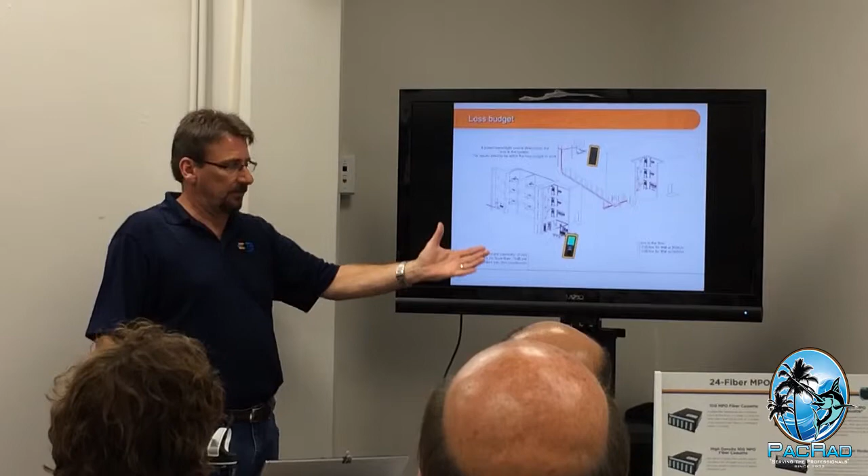Okay, here's my launch device. Here's my transmitter on the launch side, and it puts out a signal at this power level. When I get to the other end of that link and plug into the receiver, it's going to have a sensitivity that says the signal that arrives here has to be at this power level.

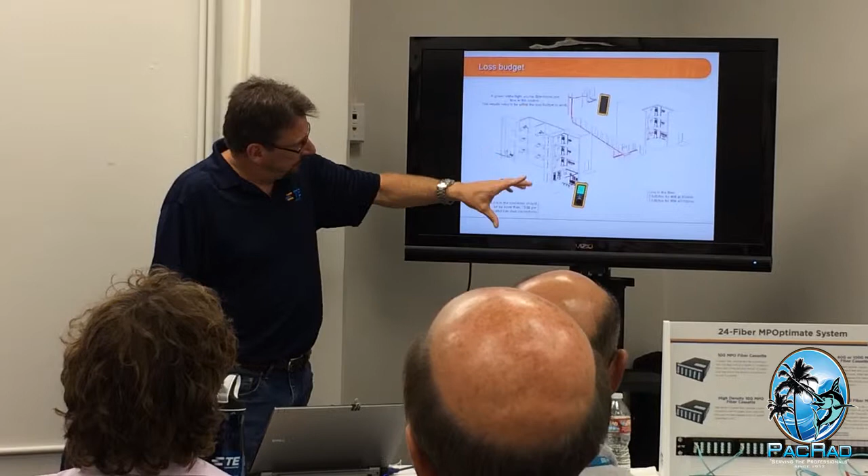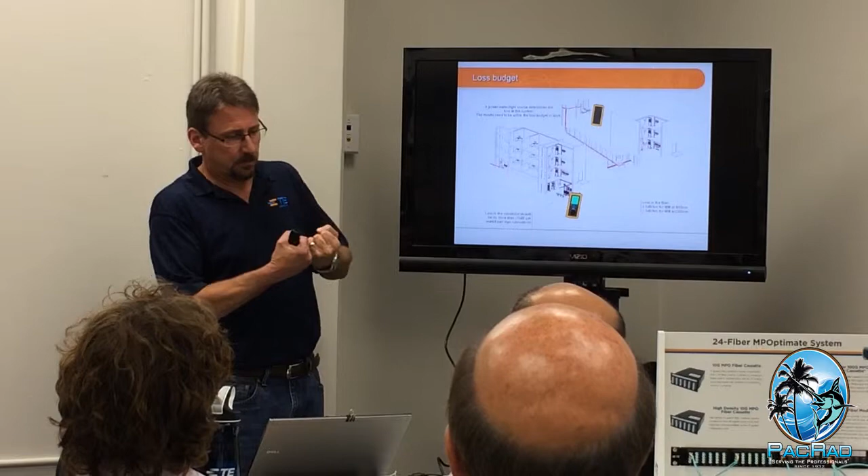All of the stuff in between, whether it's fiber cable, which will have its own bandwidth and loss characteristics just for the cable, and then there's guidelines by which the mated connections have to meet in terms of loss, and then splices as well.

So when you figure the loss budget up, you say, okay, if I add up all these points of loss and take that away from the transmit signal, is it going to be enough for the receive side? So there is some math calculation that should be done.

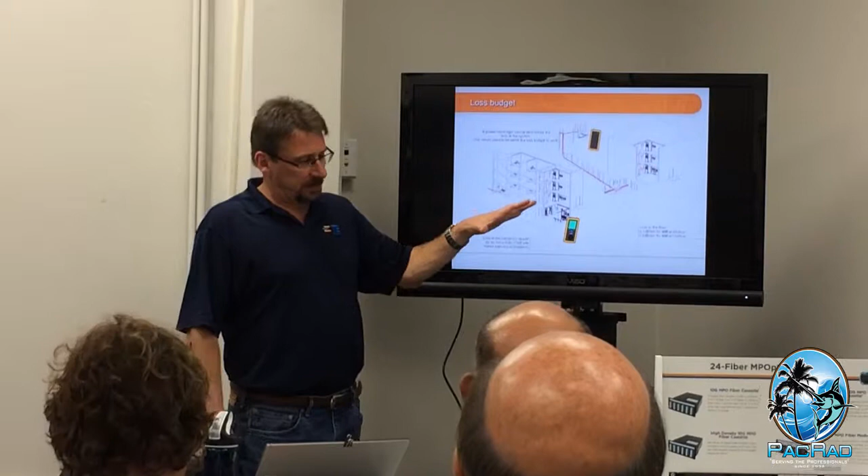Now a lot of today's testers will go out and test it and validate it for you, but it's just good practice to make sure you understand. Okay, I'm going from A to B. Here's what I'm sending in power, here's what I want to receive in power. Does it look like if I build this way, it's going to work? Because you can build it and have it not work, and then you're in trouble.

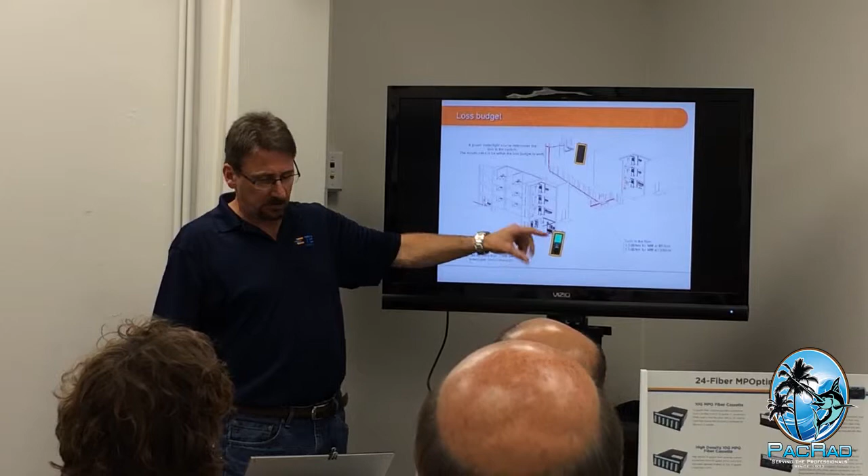But this test device is what's called an optical loss test set, OLTS, where it's just a light source that launches light into the system, and then a meter that reads at the other end how much was lost over the distance. Very important test set as well.

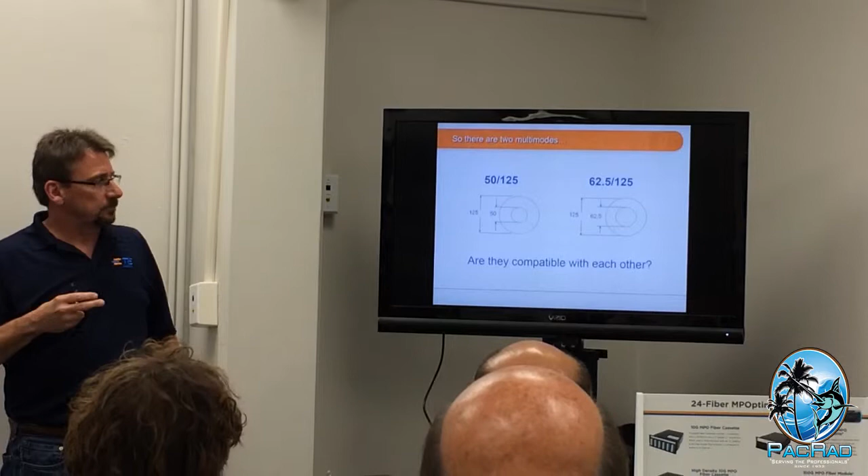Okay, so we talked about the fact that there's two different kinds of multimode, 50 micron and 62.5. Are they compatible with each other? So let's say, for example, I've got a fiber plant where I've got some older 62.5 and I want to add the newer 50 micron.

Can I intermix them? Depends if your loss budget is... to a certain extent, yes. Because I've seen it in our building where people thought that the orange fiber was 62.5, when in fact they're making orange fiber in 50 micron. Yep, and we've got a slide that talks about color codes, by the way.

The answer we like to give is no — you need to try not to mix them together if you can help it. But factually, the answer is it depends. What would it depend on? Distance? No, it would actually depend on which way the light's traveling.

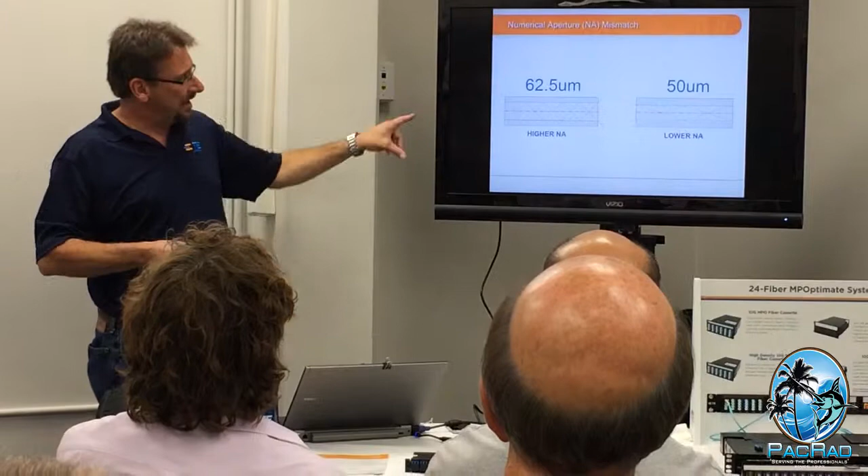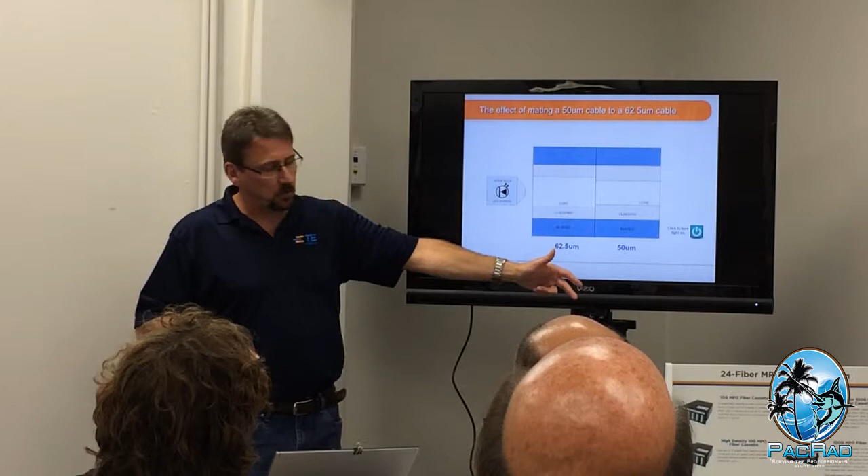When I line up a 62.5 and a 50 micron, I can see that the numerical aperture is totally different between the two. So I'm going to lose modes of light depending on which way the light's traveling. If I take a 62.5 and mate it to a 50 micron and shoot light through it that direction, what's going to happen? You'll lose a lot of the signal — you're going to strip off the higher order modes, and you're going to lose a good portion of the light pulse.

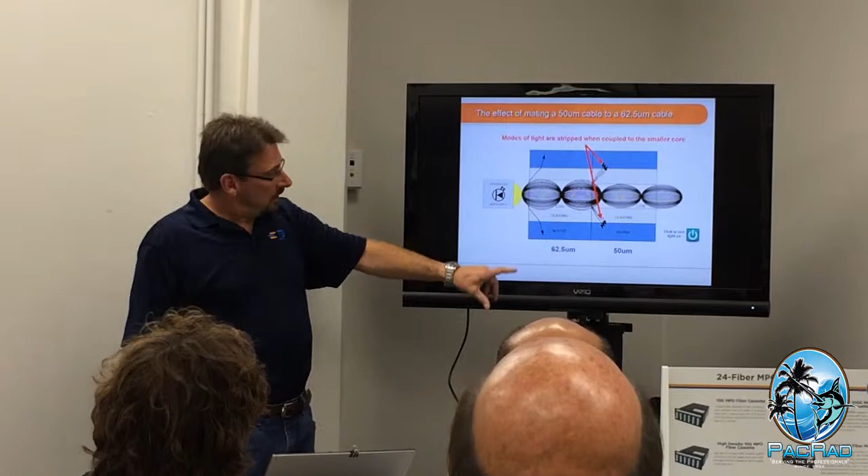So that's what happens in that direction. Now, is it the same if I go the other direction? If I go from a 50 micron into a 62.5, what happens? Do I have loss? You shouldn't, because your signal gets stretched out.

I'll have a little bit of loss associated with just the mated connection, but I'm talking about numerical aperture loss. Will there be loss associated with the numerical aperture mismatch? Potentially gain.

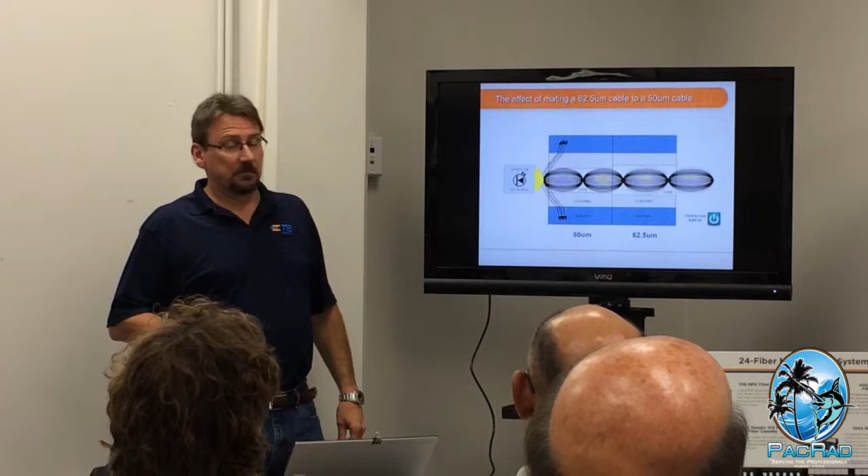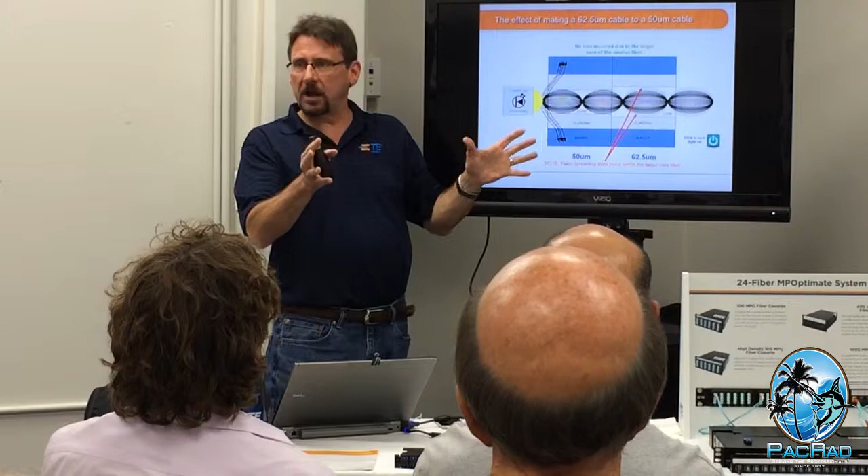A gainer is interesting. If you looked at it with an OTDR, it might show as a gainer. What happens is you don't lose anything. The light fills the core of the 62.5, and eventually, as it continues to travel down, it's going to occupy those higher order modes. The light pulse will spread. But because of that, it is going to reduce the overall bandwidth of the link because you are spreading the pulse.

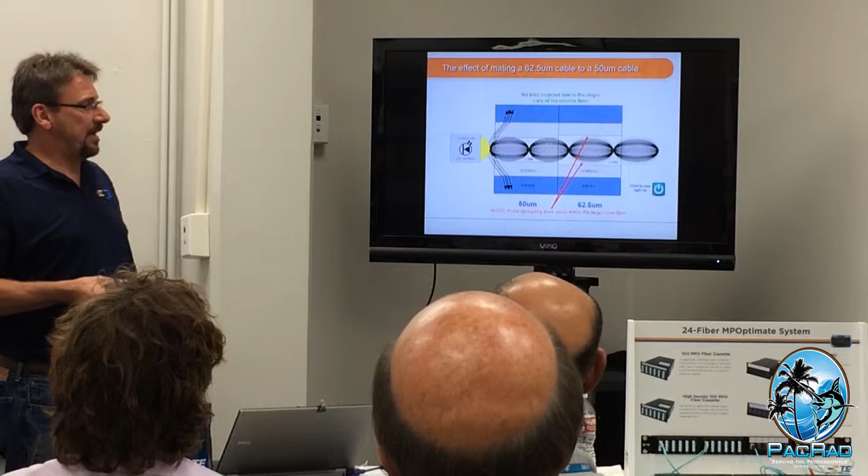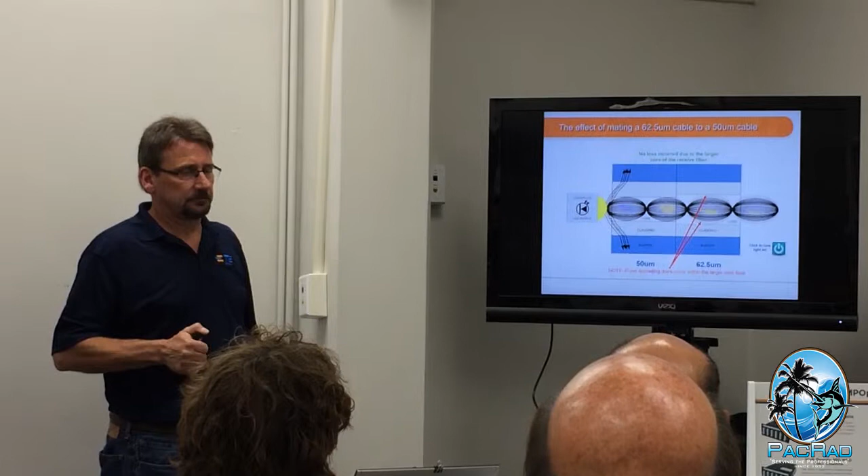The problem with that is it depends on which way you're shooting the light. So basically, if you're on site and you've got two flavors of stuff, and the client screwed up and bought this, not the right stuff that you really needed, but he has both there, you want to put the smaller stuff first in the line and then go to the bigger stuff. You'll drive yourself crazy trying to figure that out in the field.

So my suggestion is this: if you're in a situation like that, put it together, see if it works. And if it works, hey, I would advise the customer at that point, you're mixing 62.5 and 50 micron, and it's not the best idea.

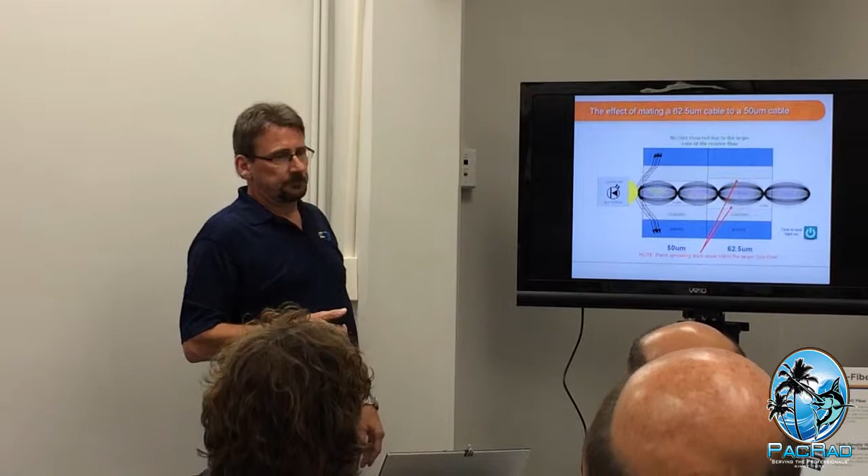Are there multimode converters to ease that transition? Do you offer some adapters? There are manufacturers who will make a cable assembly that goes from 62.5 to 50 micron, but our recommendation is always that it's best to make that change in an active device. So in other words, if I've got a switch

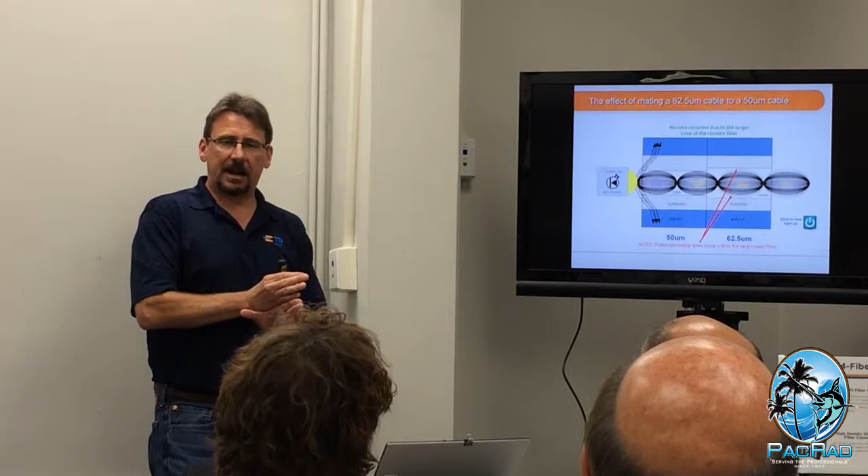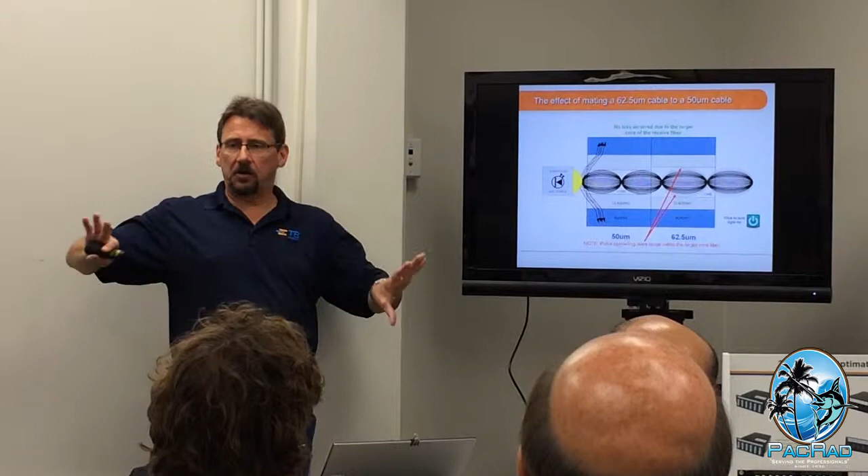Modular - where I've got 62.5 and I have the ability to add a module that will actually operate at 50 micron instead, I'll make the conversion at the switch. That way I know the plants are separate and I'm not relying on a cable assembly to make that happen. That's usually our recommendation.

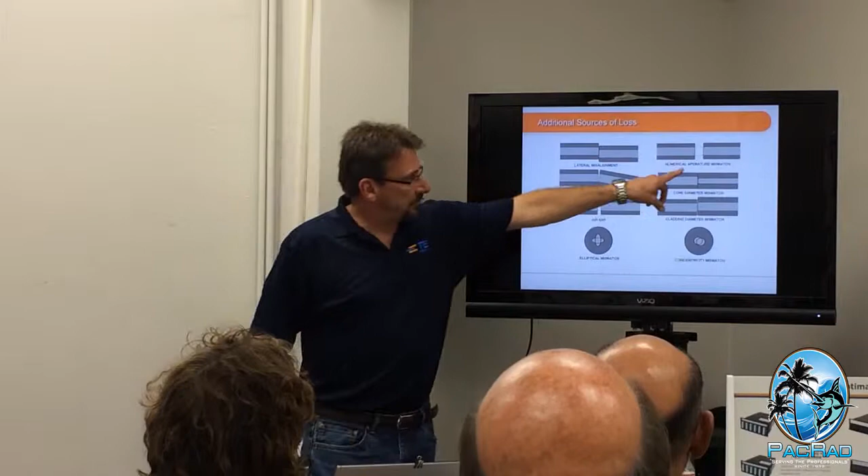Okay, other sources of loss. We talked about numerical aperture mismatch - that was the 62.5 and 50 micron. You can also have lateral misalignment of the end faces.

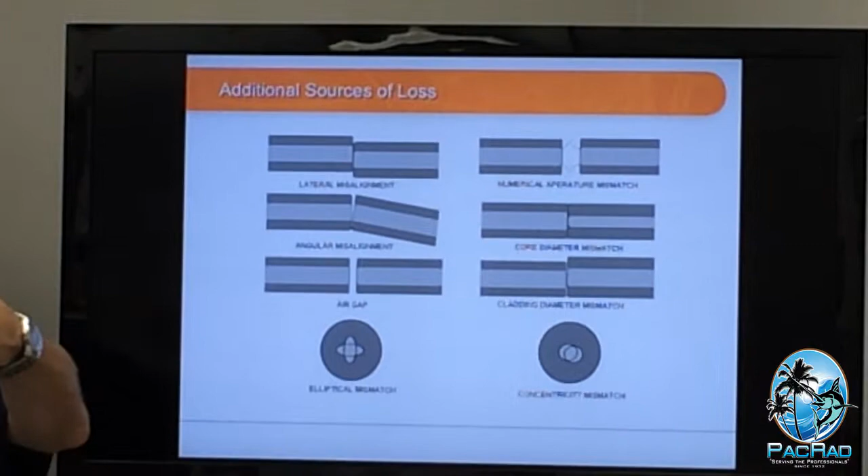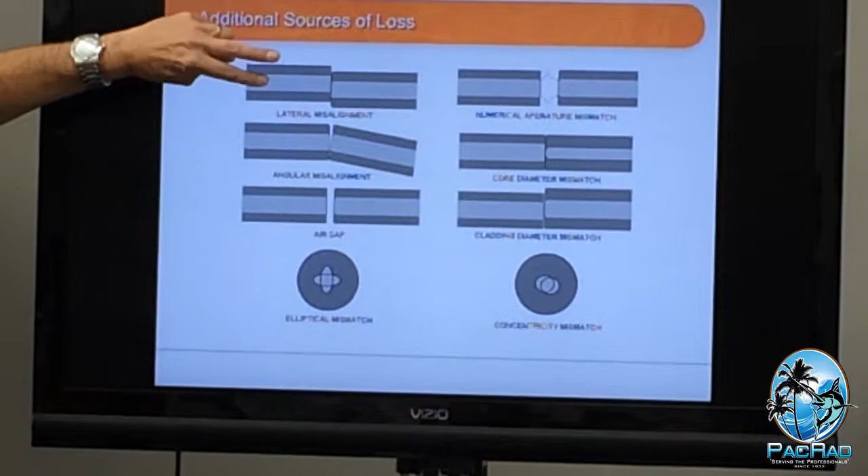Notice also, we haven't talked about it yet, but we're going to. When I have optical fiber connectors come together, they physically touch - the end face glass physically touches the other piece of glass. We'll understand more about that in a second. But if I have lateral misalignment, I'm going to have loss associated with that.

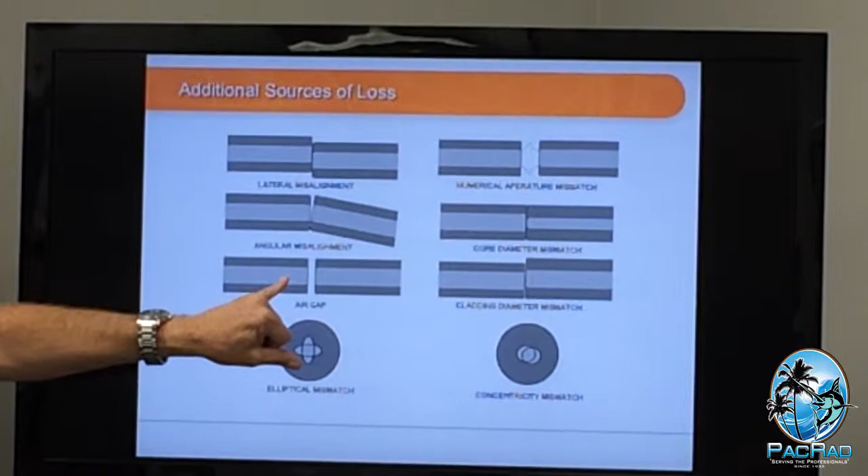Angular misalignment - obviously, an air gap is a big source of loss if it happens. What can cause that? Anybody? You don't have the connector snapping in properly. Or yeah, that, or there's another thing which we'll get to.

Core diameter mismatch. This doesn't happen often, unless you're really - I mean, obviously numerical aperture and core diameter are kind of the same thing - but this image almost makes it look like they're mating single mode with 62.5, and that would never happen.

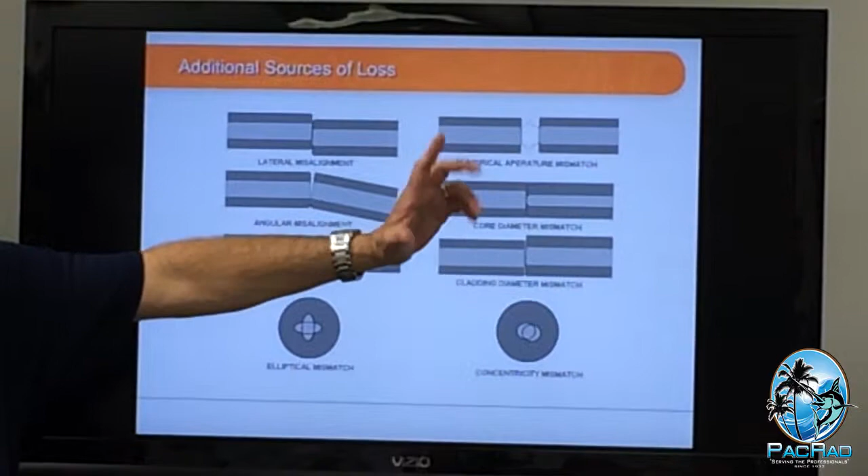These forms of loss are really minimal. But there's one that's really big that's not on here. What is it? What's the biggest source of loss in optical fiber links?

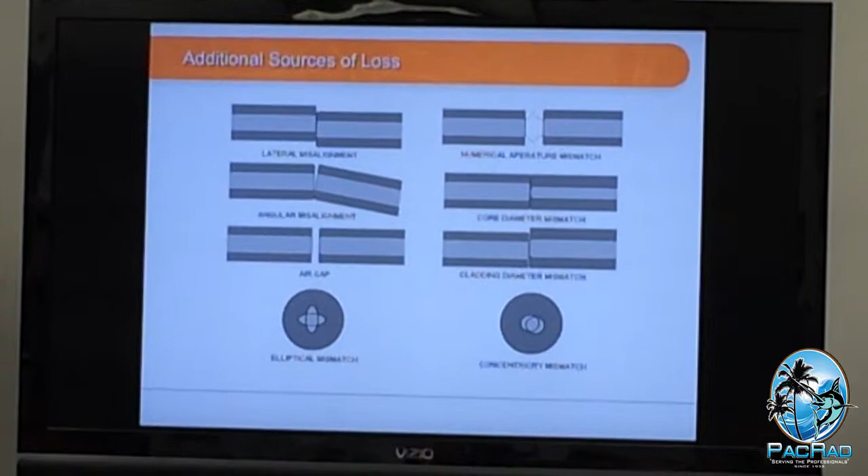Number one. Dirt. Dirt. Who said that? Winner - water bottle or stadium blanket? Oh, I'm cold.

Okay, dirt - number one preventable cause of loss in fiber optic circuits.